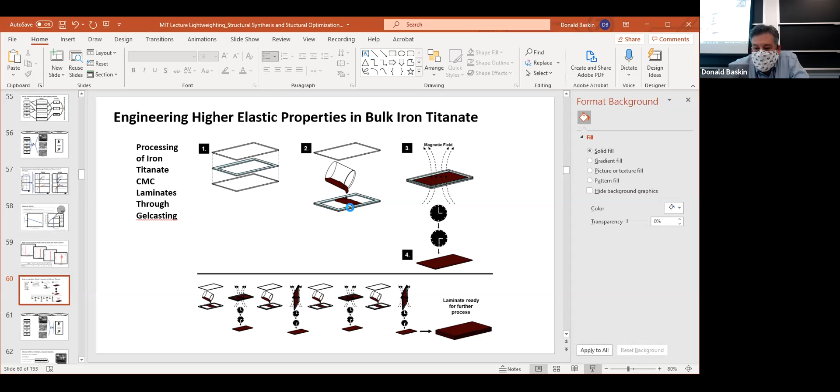I remember the Monday before MIT shut down for COVID. Or no, that wasn't... well, maybe it was the Tuesday. MIT shut down on Wednesday in March of 2020 or whatever, and I shut down on Tuesday. I said I didn't know what MIT was going to do, but they sent everybody home a week later. Okay?

The Jeffrey Epstein thing was big in there. I think one of the students asked me what I thought about that. I said, well, look, I'm not involved in the administration anymore, I don't know anything about Jeffrey Epstein. But I can tell you a number of stories about money talks at MIT.

I put together a lecture on these stories about why the venture capitalists are always around here, what they're doing, and how they're taking advantage of MIT's name. It turns out I had another guy here, an alum who became CEO of a $4 billion chemical company. He's in my house as tutor, and he basically backed me up. This is what the businesses are doing: they come in, sell the MIT name, have an IPO on Wall Street, walk away with tens of millions of dollars, and the grandmother ends up with a worthless pension fund because a lot of it's crap.

World sucks, huh? Well, the one I told most of the story about was the guys who were part of the MIT technology licensing program that ended up overnight worth $30 million, because that's on paper. But three years later, they were indicted. Professor Sadoway and I were all excited because fortunately MIT's name did not show up on the business page of the Boston Globe when they got indicted, but any other reporter could have put MIT's name there because MIT was right in there.

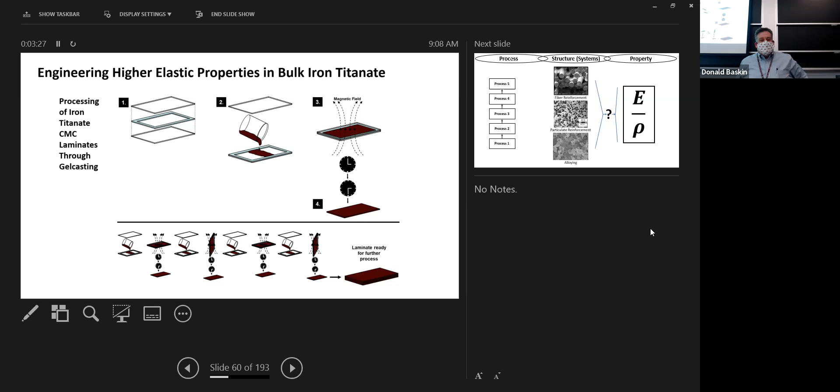It's weird. Robin, can you see the screen and hear us and everything? Yeah, I can see the screen and I can hear Professor Baskin really well. Other people are a little muted because they're behind, but it's okay. Everything's good, you can see the screen? Yeah. So I can assume I got this right for once? Okay, wow, that was encouraging talk.

Julian, did you like the Chimad conference? I saw you were in there. Yeah, I liked it, I knew a lot of the talks already.

Okay, when was that, Tuesday? Yeah, so this past Tuesday was the yearly conference for the Center for Hierarchical Materials Design, Chimad. It's an organization that focuses on computational materials engineering, started at Northwestern, so they make a big deal out of being in Chicago. They had their yearly conference, and Chris Schuh from this department gave a presentation, which was very interesting, on grain boundary chemistry — if you have certain species in the grain boundaries, you can actually strengthen or weaken the material. It's very interesting, I keep talking about it with physics.

Okay, so in our last lecture we talked about materials, ICME, structural property performance relationships. We talked about stiffness, engineering stiffness in the material, and then trying to predict stiffness based on parameters or features of the microstructure. I meant to have this slide in the last lecture, but somehow I screwed that up, so it wasn't in there, and I wanted to go over this again just to make sure.

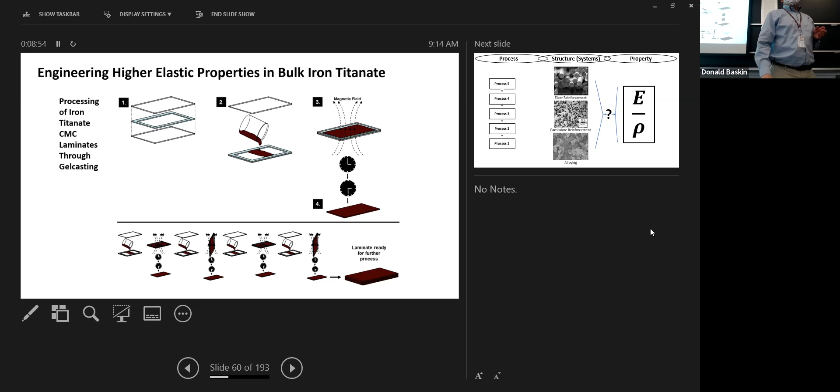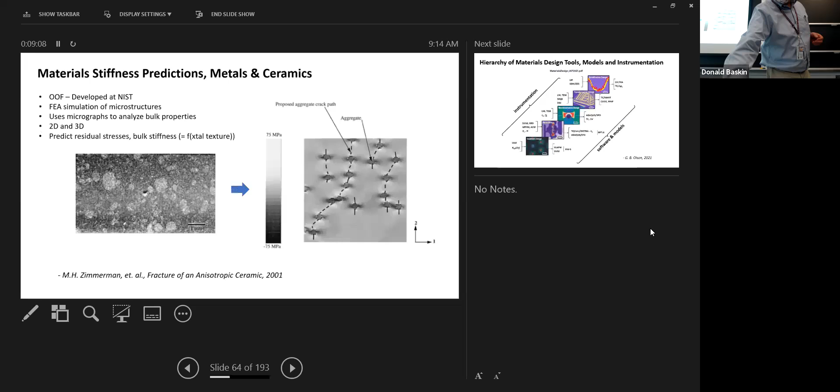Last time, remember, we mentioned aluminum-lithium. Aluminum-lithium has a higher stiffness than just aluminum. So we went through these different examples. Clear from the conference?

This is interesting, lifted from Greg Olson. This is length scale, going from small to bigger, and it shows the different models you can use to model material behavior at different length scales, on the right side. On the left side are different instruments or tools you can use to measure these properties that you might try to predict with the models on the right.

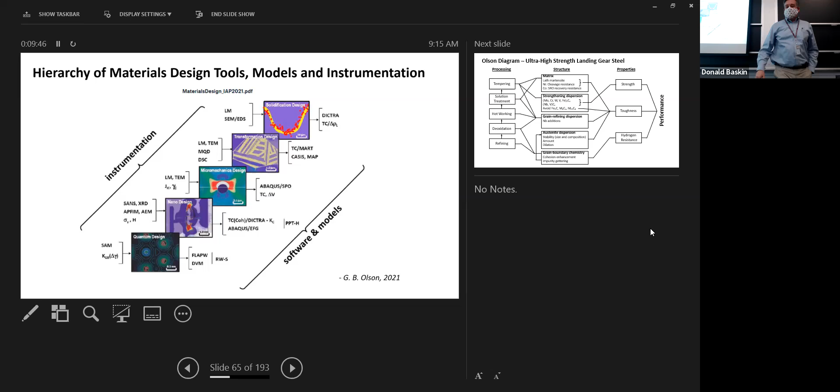Okay, Olson diagram, Greg Olson. I should tell you he's teaching a design and materials course in the spring semester. If you like this computational materials engineering approach and structure-property-performance relationships, you should take this class because it's really good. I took this class when he taught it at Northwestern, and I learned a lot. It's a very inspiring course about how to actually design materials, not just take book values.

ThermoCalc is very easy to use. It's even easier to use now than it was back when I was a grad student. It has a great graphical user interface now. It's very friendly, I'm sure you won't have any trouble with it.

If you get into trouble using ThermoCalc, just as an example, there are people on campus who can show you how to use it. Like Clay Hauser, one of Professor Olson's grad students, who's now a grad student at MIT. I know he's in town—ask for help.

You might have to be a little bit proactive and stand up and say, hey, I don't understand how to do this, or I don't understand how to do the calculation. Somebody, I'm sure, will show you how to do it.

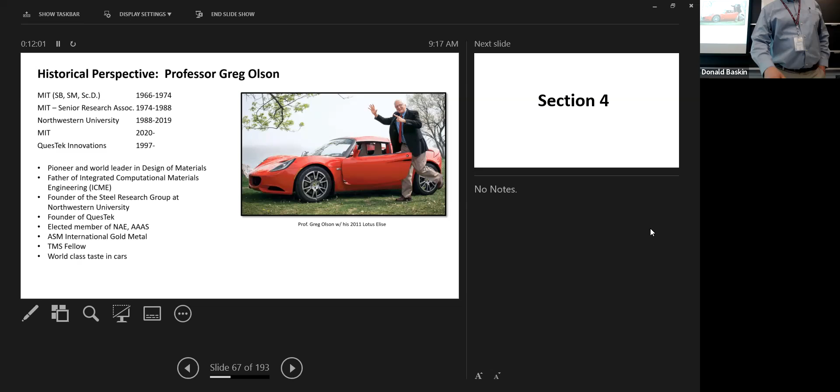Okay, so that is the part of this course that involves materials. So we can now shift gears and talk about lightweighting via geometry, what I call geometrical synthesis—synthesizing the dimensions of a part to meet its mechanical capabilities, maybe in terms of strength and stiffness, and then figuring out how to do that at the lightest weight.

Before I move on to that section, does anyone want to talk? Anyone have any questions about the material side of this?

You mentioned the modulus, like saying something has the modulus assumes that it's isotropic. But for anisotropic materials, is it okay to have the same value in one direction but not the other—orthotropic? Is it still okay to see the Young's modulus in one direction and then the Young's modulus in another direction? Or is that not common? We made those kind of calculations in one of the undergrad classes, but I don't know—is that a common thing that's used in industry?

It's almost like saying Band-Aid instead of bandage. Every Band-Aid is a bandage, but not every bandage is made by Band-Aid—some are made by 3M, some by others, maybe in Germany there's Tesa. So it's one of those things that's really a technical fine point, and very few people will call you on it. Technically you shouldn't do it, but no one's going to think you're stupid if you do, so I wouldn't get too hung up on it. But when I write papers or proposals or presentations, I'm always worried somebody's going to call me on it, so I'm always really careful to say these are elastic constants, and that's a Young's modulus, and they're not the same thing.

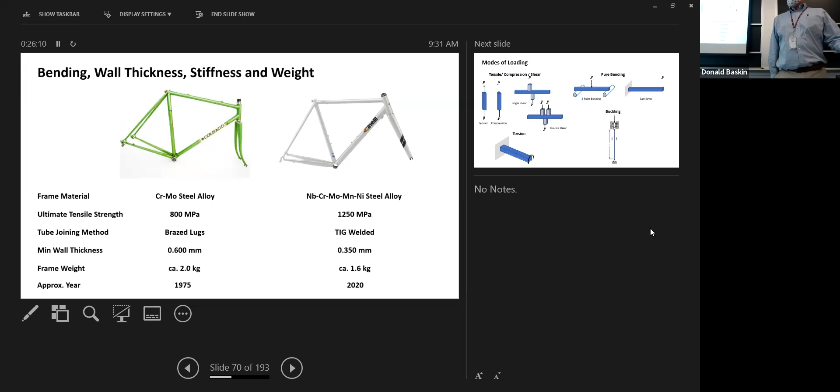Okay, so modes of loading. Sounds like Christiane, sounds like you know about this stuff. Yeah, I was a mechanical engineer in grad school too, but I still came across a lot of mechanical engineers who didn't know this stuff in my career.

So these are the basic modes of loading: there's tension, there's compression, there's shear - single shear versus double shear. There's 3-point bending, 4-point bending, there's torsion, and Christiane just mentioned there's buckling. These are probably the 5 basic modes of loading. Materials engineers in the room, I don't know if you guys got this sort of stuff as an undergrad.

You did? Okay. There's a question about single shear and double shear. So the shear is going like this, right? And then the double shear, is that 2 different pieces or is it the same? Let me show you.

Suppose you had an A-arm - this is a suspension component, right? And there's a hinge at the end. So if this is a car, you'd be looking downward on the car, in plan view.

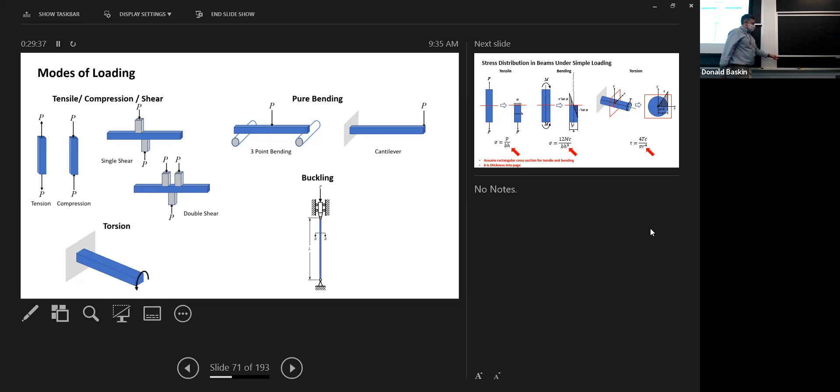Okay, so it's the middle bar that's being - I was looking, the blue one's being loaded up, yeah. Gotcha, okay. Everyone see that? Don't forget to erase it, okay.

Our friends in the mechanics department have long ago calculated out the stress and the stress distribution given these different modes of loading. In simple cases, if something's loaded in tension or compression, the stress is linear with this dimension h - the dimension b would be into the page, and h is this dimension. This is just linear. If you hold b constant, the stress will go down linearly with h.

As you go wider, the stress goes down, just linearly with h - it's a linear relationship. When something's in bending, it gets more interesting. The stress actually goes down with the cube of h, assuming b is held constant.

This becomes a very powerful tool for lightweighting because of this cube relationship. Torsion is even better - if you have a tube in torsion, the stress goes down on the outer skin of this tube, in tension, with the radius to the fourth power. This is an important fundamental to remember. Everyone got it?

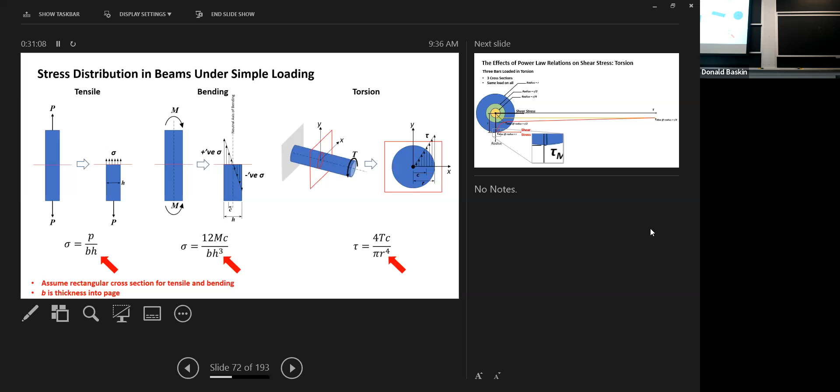Here is a graphic I tried to put together to give some sort of gut feeling of what this means. Here are three different tubes in torsion, with increasingly smaller radii. If you start on this outside one, this blue one, and you apply some torque to this - this little vector on the end, I tried to draw it in scale.

I tried to magnify here so you can see - the length of this little vector is representative of the stress in the outer skin of this bar in torsion. If you then halve the radius to the green one, the stress goes up from this little tiny thing right here to that thing there. The length is representative of the stress - the longer the length, the higher the stress.

If you then cut that in half again, so the radius of the yellow one is 1/4 the radius of the blue one, this gigantic yellow line right here - that's how big the stress is in the outer diameter. So for the same torsional load, as you decrease the diameter, the stress goes up very, very quickly on the outer skin.

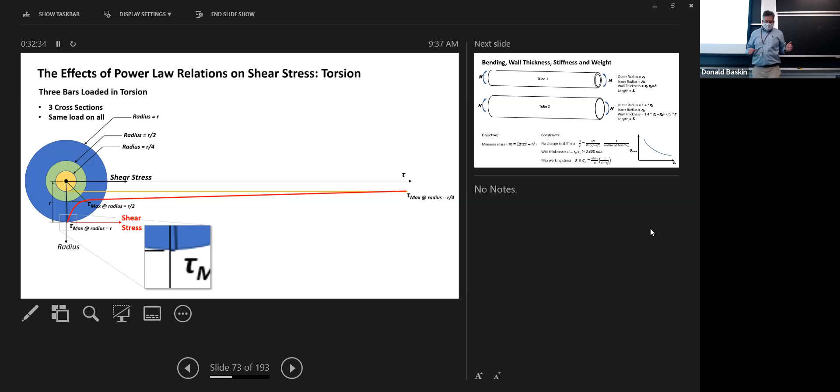You can use this to your advantage in lightweighting. This is what we just described with the white bike. Rather than having one way to reduce weight while maintaining stiffness, you go to a larger diameter and a thinner wall thickness, so you have less volume of material overall. That's reduced weight, because density stays constant. But you have the same stiffness because you're taking advantage of the stress drop as you go to a larger diameter. Stress and strain always go together. Stress equals Young's modulus times strain, always.

In this case, we've got two different tubes, tube 1 and tube 2. They're both the same length, both subject to the same bending moment, and both made of the same material, which means they have the same Young's modulus because it's isotropic. Tube 2 has a diameter 1.4 times larger than tube 1, and half the wall thickness of tube 1. For the same stiffness, tube 2 weighs 0.67, or two-thirds, the weight of tube 1.

Very effective. So you've maintained your stiffness and reduced weight by like 30-something percent. Very effective way to reduce weight, and this is what they did in the white bike.

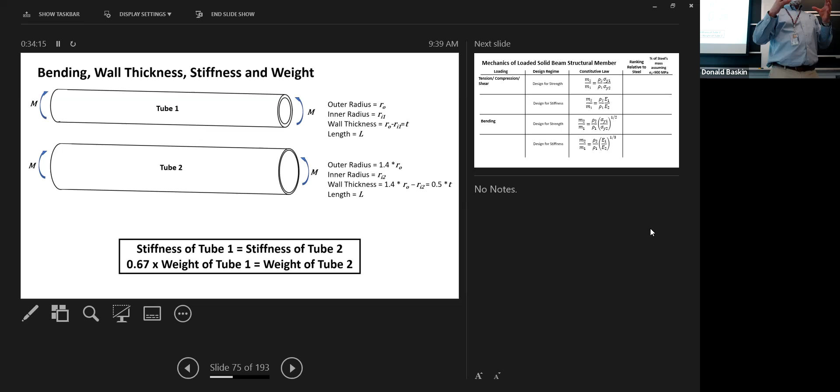I have an example I'm probably going to show you next lecture where I've done the same thing with torsion, to show how much weight you can drop when you make the outer diameter bigger and reduce the wall thickness. I'll show you this next lecture.

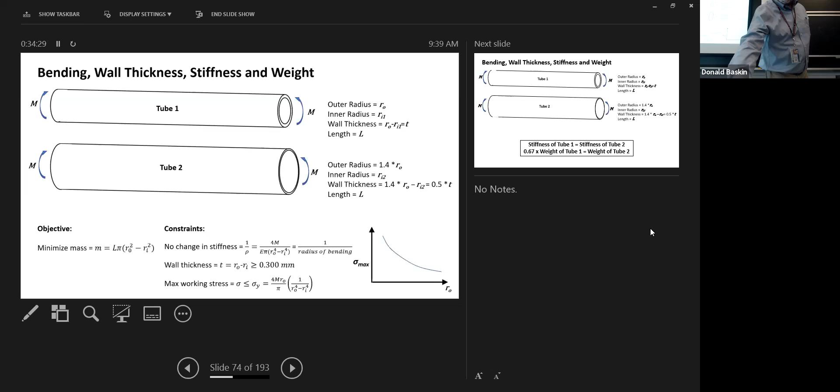Based on these stress equations that I've shown here, I've derived what I call the constitutive laws for mass savings. This is if you have the same geometry part, but you substitute one material for another and maintain stiffness or strength. What is the potential for weight savings? M is mass of a structure, rho is density, sigma is stress, and E is Young's modulus.

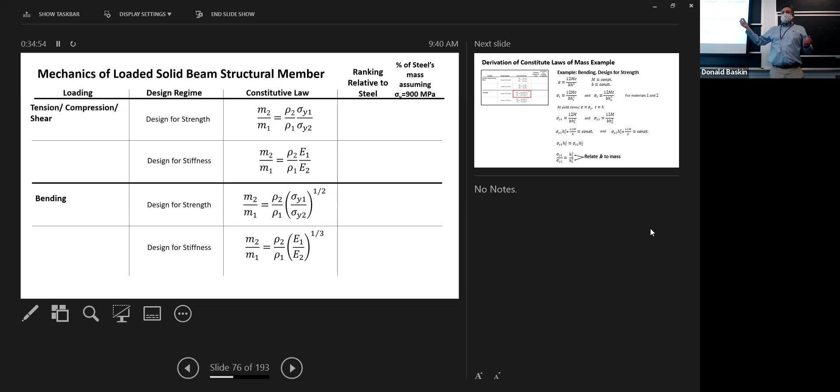Here's a derivation of the equations I just showed you on the previous page. You guys are good at algebra, you can figure this out on your own, but I wanted to put this up there so you can see what it looks like. I need to get you a copy of this slide deck so you can look at it yourselves. All you're doing is taking equations for the stress for two different structures made of different materials, equating them together, then solving for the ratio of the masses. It's pretty simple.

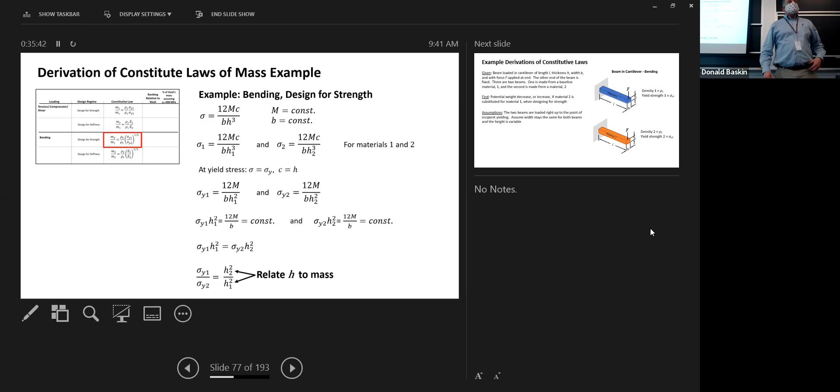So this comes up. You can go through this on your own. You guys are good at math, I'm sure you can figure this out.

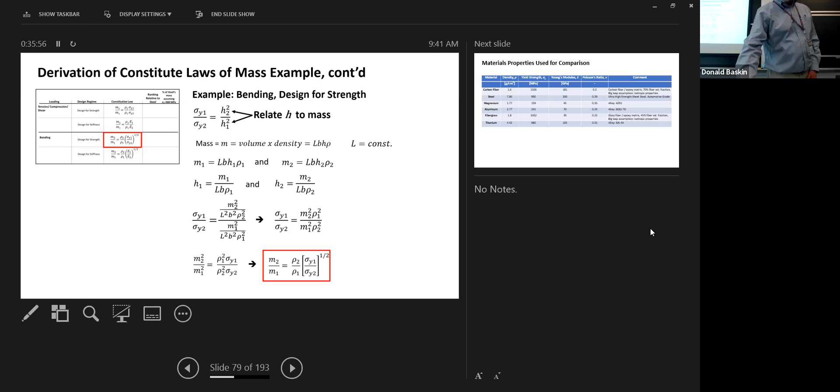If you take table values, which you're not supposed to do as a materials engineer, but if you take table values—these are just uncontroversial numbers I pulled out of a mechanics book, a journal paper, an ASM guide, whatever it is—you take the values from those books and start plugging them into these equations. It's interesting what you learn.

Here we have numbers for carbon fiber, kind of normal garden variety carbon fiber with about 70% volume fraction fibers. Steel, magnesium, aluminum—it's 6061 aluminum treated to a T6 condition, meaning it's artificially aged. Fiberglass, nothing fancy, and then titanium—your garden variety 6-4 titanium, which is very popular, say, in fasteners.

You start plugging these equations in. On the far left you have the mode of loading, then in the next column over you have the design regime—are you designing this part because it needs to be stiff, or because it needs to be strong? Which of these requirements requires more material to meet?

In a design-for-strength scenario, you're adding material until the component reaches a certain load carrying capability. If you're designing for stiffness, you're adding material—like wall thickness or diameter, cross section—in order to get a certain stiffness. So when you put an elephant on the end of a beam or a diving board, how far does it flex? That would be an example of a stiffness requirement.

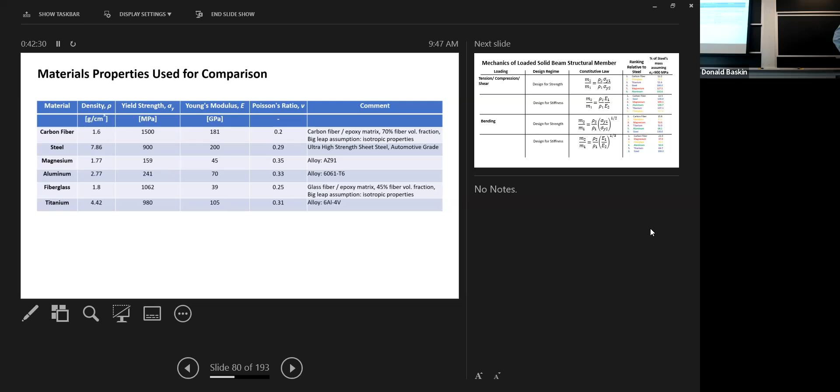Okay, percent - are these carbon fiber in epoxy or what? Yeah, that was in here. So this is carbon fiber epoxy, 70% volume fraction. I've made the assumption that these are isotropic properties, which they're not, but just to make calculations easy. Any questions on this, guys?

So here's an example: you have a roof panel on a car. A roof panel doesn't do much as far as the strength or stiffness it imparts to the car body. The roof panel is typically very thin when made of steel, like 600 microns, even on a Toyota Corolla, a very common car. What material would you choose for that, knowing that it's imparting very little structural job?

And cost is important. Any thoughts? If you look at some upper end German cars, you'll see they put carbon fiber roofs on some of them, and it looks cool. But because the carbon fiber really isn't doing much other than keeping wind and water out of the inside of the car, it's not saving you much weight to do that. I always used to say that Chrysler, if they could make waterproof cardboard, they would use it. Because some panels on a car don't do anything other than keep out wind and water, yet you substitute very high mechanical capability materials into those applications, and you're spending a lot of money, but it's not really doing much. So just be wary of that scenario.

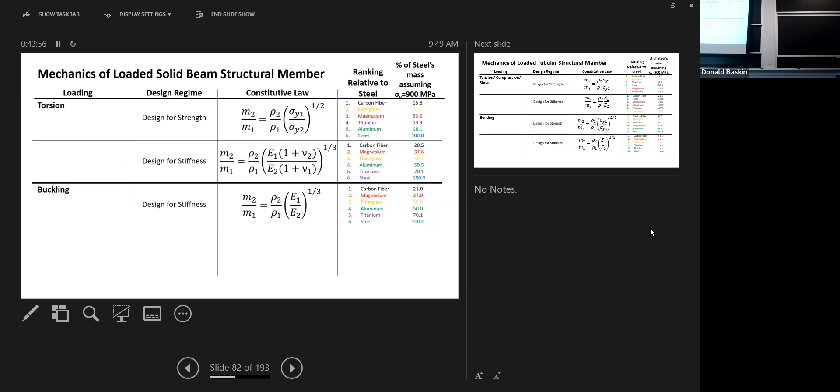All right. Here's some more examples under different loading conditions. Buckling, your favorite one, Christian. You go back and look at that.

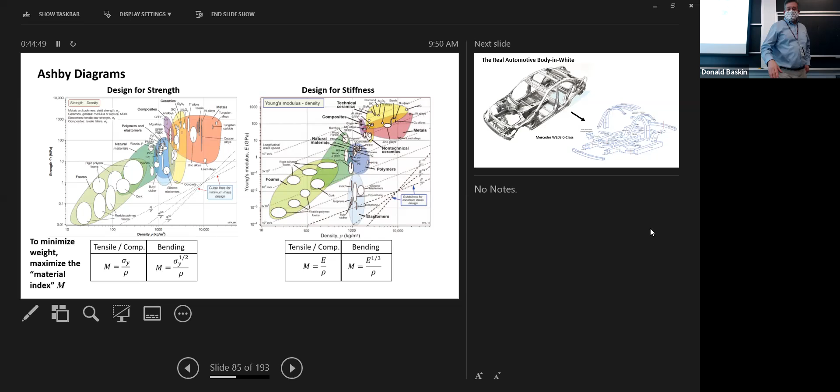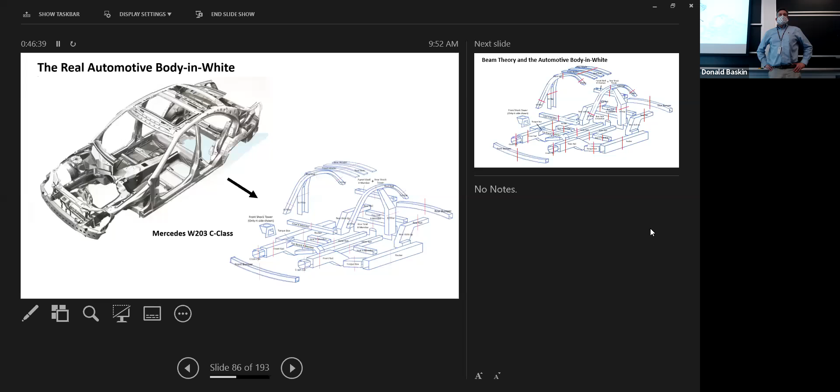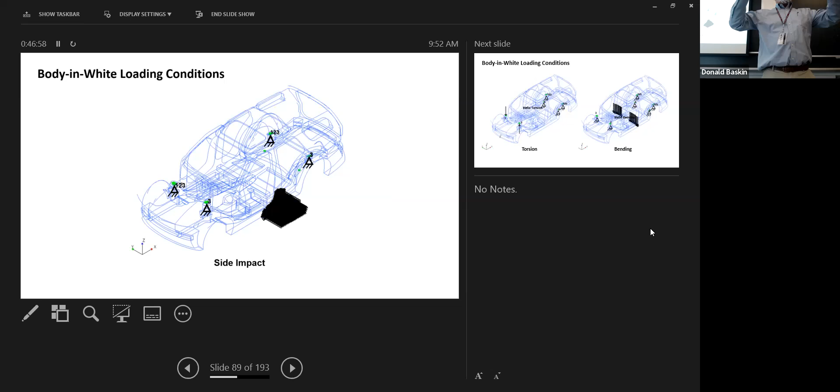These are some examples of different structural members in a car body. You can start to think of a car body as being made up of these different structural members, for different loading conditions: front impact, rear impact, global torsion—take the body and twist it—global bending—take the car and bend it. It's possible via intuition and via finite element analysis to determine the mode of loading on each of these different structural members. Once you know that, it becomes very clear which members are worth spending money on to use exotic materials like aluminum or magnesium, and which ones you're not going to get that much benefit from. You might as well just use steel.

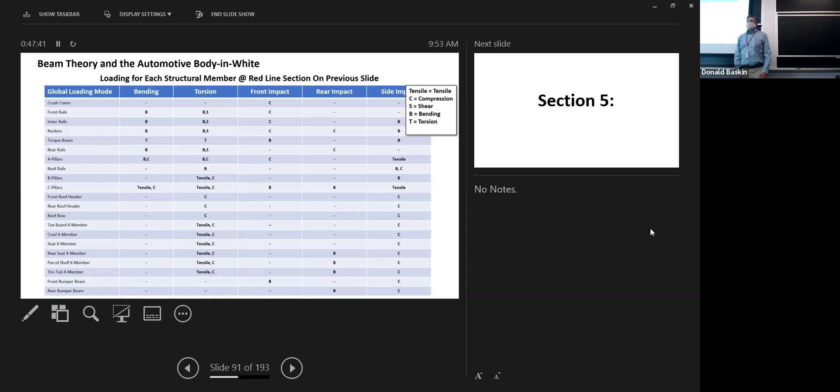For example, these roof header, roof bow cross members go into compression only when the car's loaded in side impact. They really only ever see a compression load. Because of that, you can often do better with a steel part than an aluminum or magnesium part, to make a lighter structure with steel, or at least a cost competitive structure that's lightweight, compared to making it out of aluminum, magnesium, or titanium. Other members, like front rails—well, that's probably not a good example.

There are these other components that have mixed mode loading. They see bending, torsion, and tensile forces. Those are the materials where you can do better with aluminum—you can create a lighter structure from aluminum.

The Audi TT, the most recent generation Audi TT—you guys know that car? I guess it's getting to be kind of old. I guess that car came out 20 years ago.

The second generation of that car used what's called a mixed material solution, following this strategy: cross members were made of steel, longitudinal members were made out of aluminum, some cross members were steel, and steel was used for closeout panels because it's cheap and doesn't need much. But they used the exotic materials where they do the most good, like in rail structures, B pillars, and A pillars—things that are under bending rather than just compression or tensile.

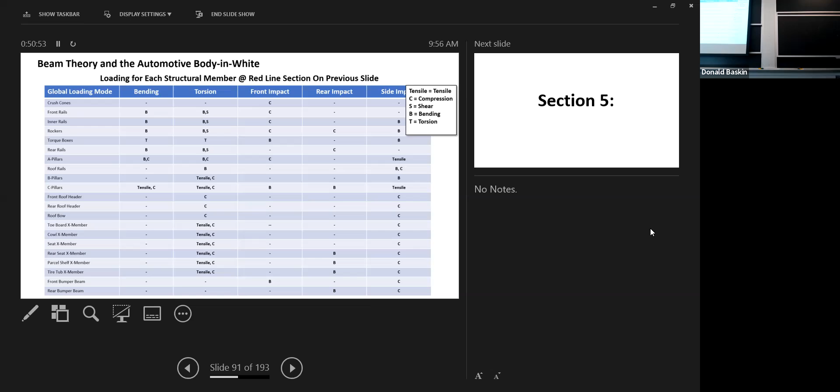I was rushing through this, but the way car companies measure torsional stiffness of a body structure is they grab it by the suspension mounting points and twist it.

This is the entire car body, with global loading—they twist it. For bending loads, they put a beam across like the front seats, hold the car fixed by the suspension shock towers, and push down. That's how they measure bending. They also have dynamic versions where they hit it and measure the natural frequency.

So how important is the global coordinate loading? Imagine an off-road vehicle—the car would see a lot of different things. It's like a normal car, really.

You feel torsion loads when you're cornering—or rather, you feel the effects of torsional stiffness when cornering. It has to do with how the car responds when you turn into a corner. If there's a lot of movement, you turn the steering wheel and have a vague feeling of where the car might end up. When it's very stiff, it does what you expect much more reliably.

Just to give you an idea: Formula One cars in the 1960s had a torsional stiffness of about 5,000 to 6,000 Newton meters per degree of twist. Modern Formula One cars have about 60,000 Newton meters per degree—much different. A good sedan, like a Mercedes C-Class, is around 27,000 Newton meters per degree, just to give you a range.

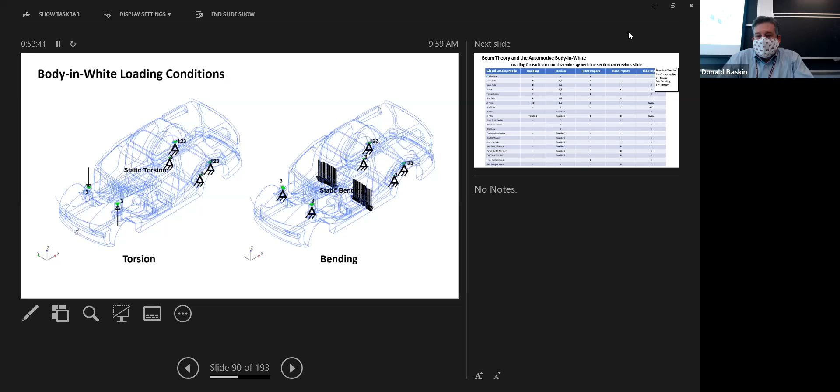Like Ashby plots—it's like all roads always lead to carbon fiber unless...